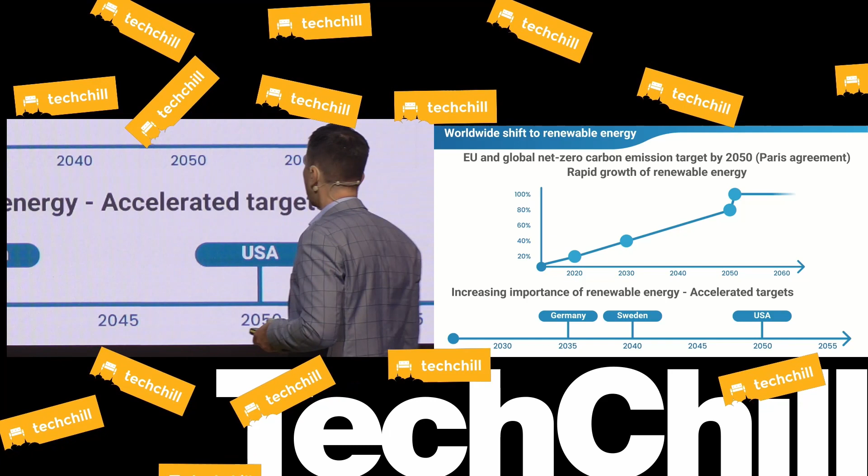So we investigated the wind industry. What we understood is to reach zero carbon emissions, the world needs to switch to renewables. There's an agreement, the Paris Agreement, where a lot of developed countries have signed that they are switching to renewables.

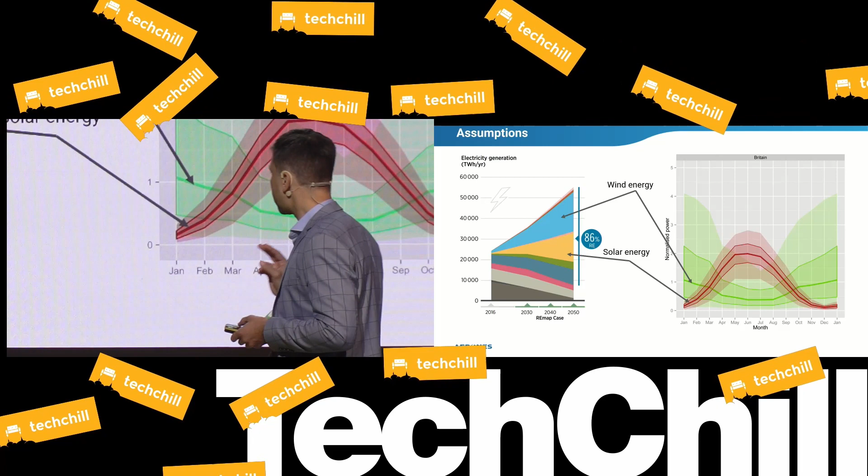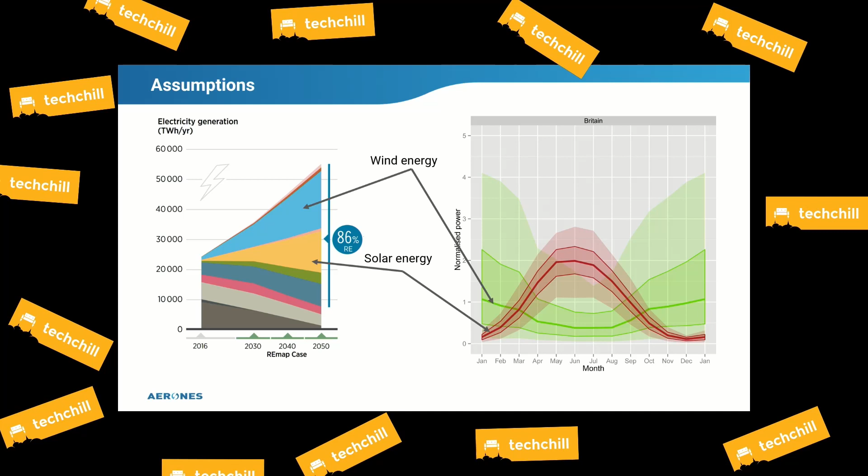We will drive a lot more electric cars, so energy consumption in the world will at least double in the next 30 years. The two biggest technologies to achieve more renewable energy are wind plus solar. Why plus? Because this is Britain - in January, February, March there's a lot of wind but practically no sun, also October, November, December. But when there's a lot more sun, there's a lot less wind. So they are complementary technologies, and wind will always be built together with solar to compensate each other.

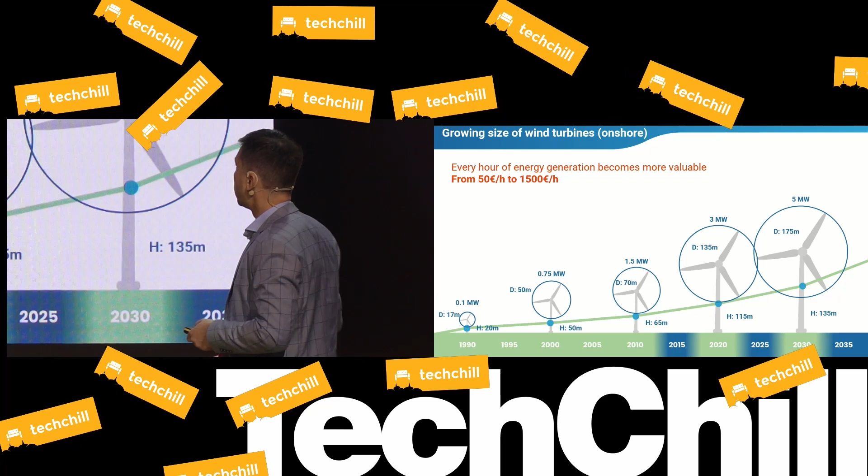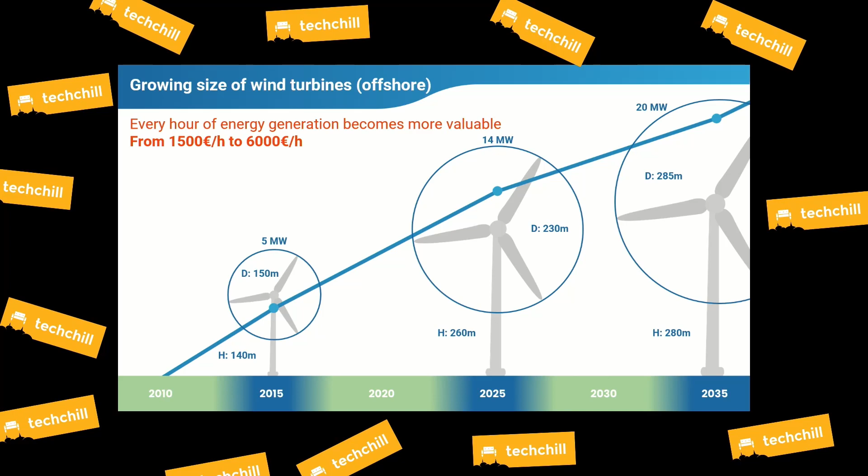Wind will grow approximately 10 times. Turbines will become bigger - every 10% increase in blade length gives 20% more efficiency. This is why they want turbines to become bigger and bigger. But the bigger the turbines, the more expensive the downtime due to maintenance, inspection, and repairs. The biggest turbines right now produce 1,500 euros per working hour, and future turbines will produce even more, up to 6,000 euros per hour. So the downtime costs more and more.

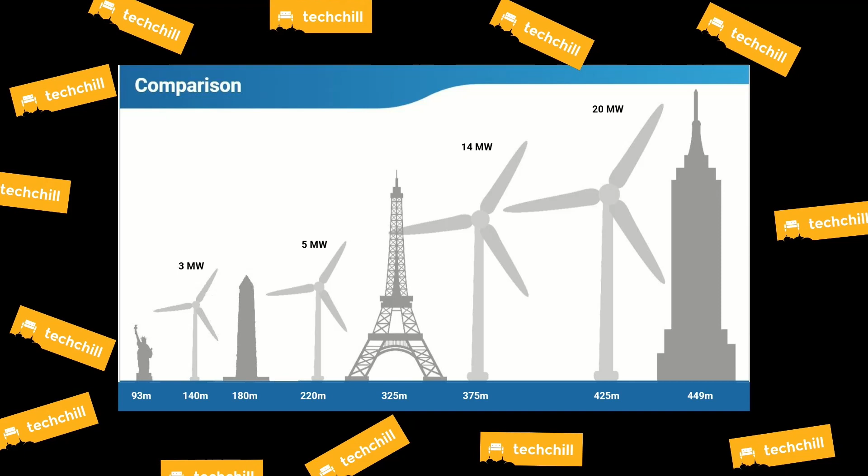You see the actual size of the turbines being built right now. But the bigger the turbines, the bigger the blades, the bigger the problems.

These high structures, wherever they are, lightning is damaging them a lot. One building receives one lightning strike in 5 years. Turbines are receiving hundreds of lightning strikes per year in some regions.

Bugs, dust, dirt, algae, resin on the leading edge of the blade reduce efficiency. When icing happens, turbines are stopped - they're producing nothing. Leading edge erosion occurs because turbines are spinning at 360 kilometers an hour, so whatever hits it hits hard. The water in the air actually works like sandpaper on the surface of the blade.

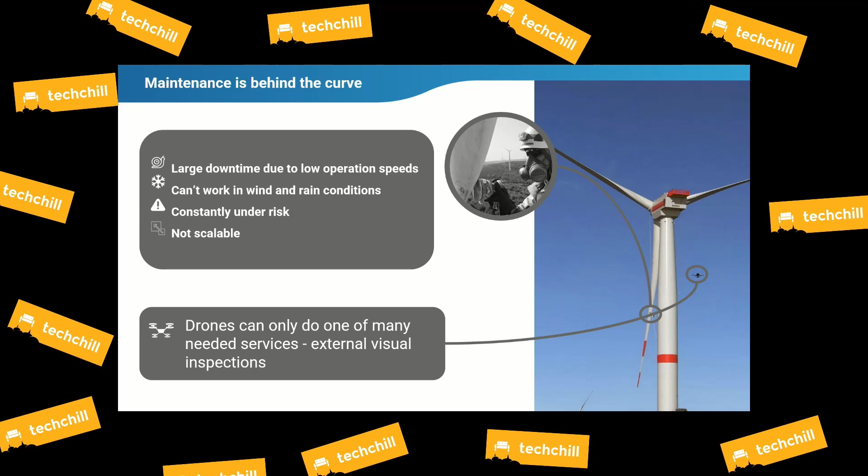They twist, they bend, they stretch, so they crack. There are a lot of oil leakages on the blade and turbines from the hydraulic systems, which need to be cleaned. Believe it or not, all of the maintenance and repairs on those huge structures are being done by people hanging on ropes, doing it by hand.

It's ridiculous. It was okay when the blades were 30 meters long and turbines were maybe 100 meters high. Now turbines are 400 meters high and blades are 120 meters - it's ridiculous. So some automation is inevitable, and here is Aerones coming to solve the problem.

In 2019, we started to trial these winch systems and robot. In 2020, we actually started doing the job on real turbines - working during the day, repairing the robot during the night, improving during the weekends. That was the path of how we were doing the job, and we succeeded. Customers started to believe that hey, it might work.

In 2021, we had 2 robots at the beginning of the year. We started to add more valuable services to customers, and customers started to believe and order more. We were becoming faster and faster by automating the robot and the processes and procedures in the field. Now we are scaling rapidly - starting from July, we have scaled a lot, and you will see that.

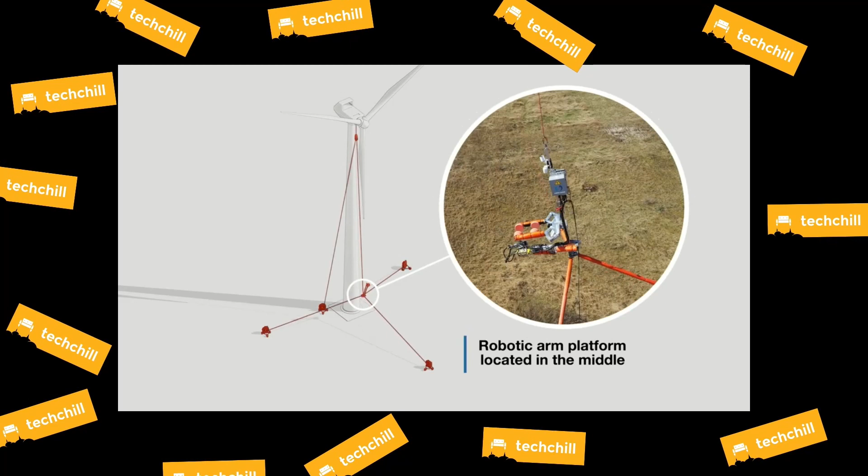So here's how our system actually works. We put 4 winches on the ground and a robotic arm platform in the middle. The first winch pulls the robot up and down, and the rest of the 3 winches adjust where the robot is in horizontal space. It's kind of like a 3D printer upside down. We can move at 4 meters per second speed.

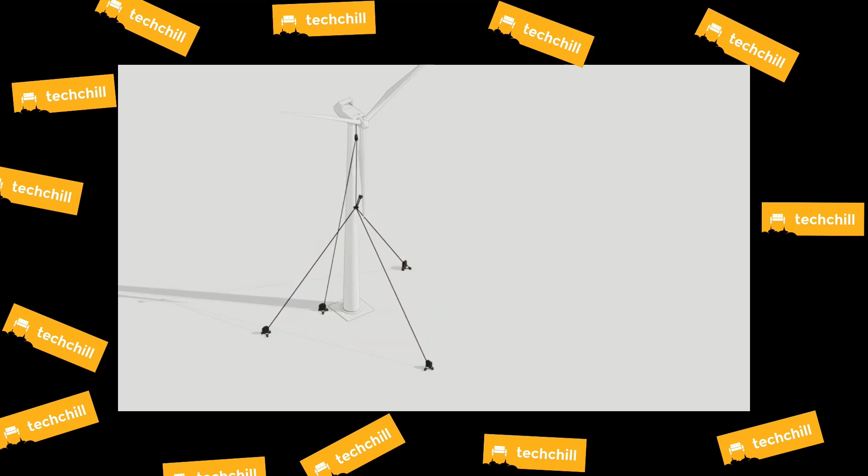Rope technicians, when they need to move from one point to another, like half a meter or a meter, it takes sometimes several minutes. We can move 4 meters per second. So we are not limited in our movements, we are not limited in our actions.

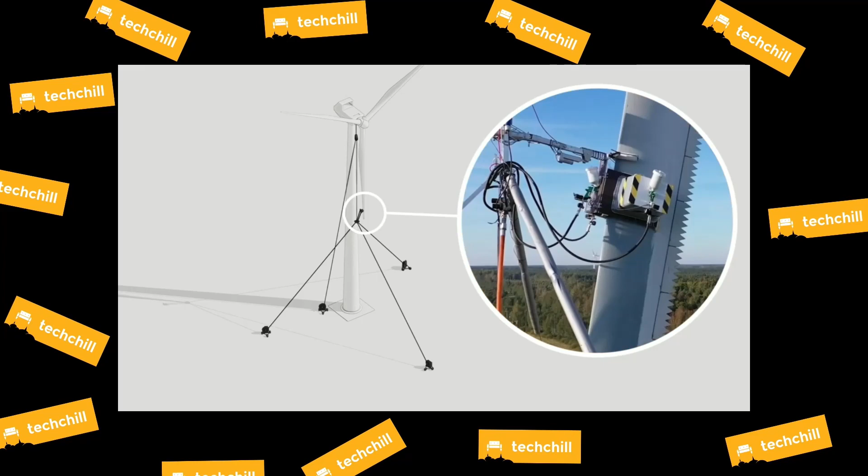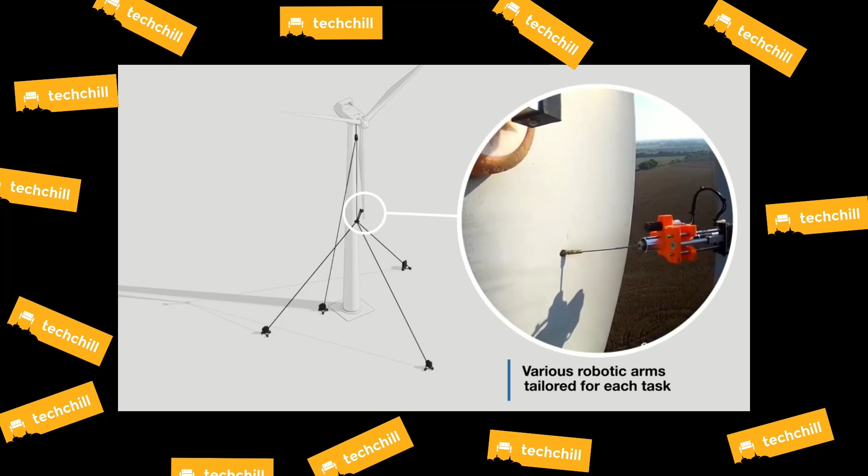In the middle, we change different kinds of arms to do different tasks: sanding, grinding, painting, cleaning, lightning protection system test, visual inspection, ultrasound, etc. So there are winches, there are robotic platforms, and here's the human. The human sits in a comfortable chair, controlling the robot remotely. The automation is now to the level that any guy who has played PlayStation learns to control this robot in 5 minutes, even less.

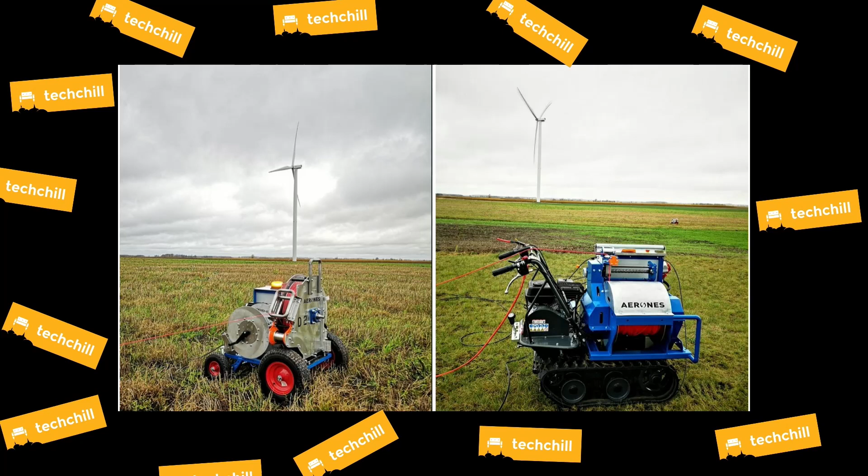The winches are simple to use, just put in one place, plug one connector, and it works. Currently, the guys are working in the field, one team with one robot, bringing, installing, and controlling in the same place. When Starlink is up and running, we will control the robots remotely. The teams will put one robot after another onto one turbine, then a second, then a third, and we from the office will control the robots.

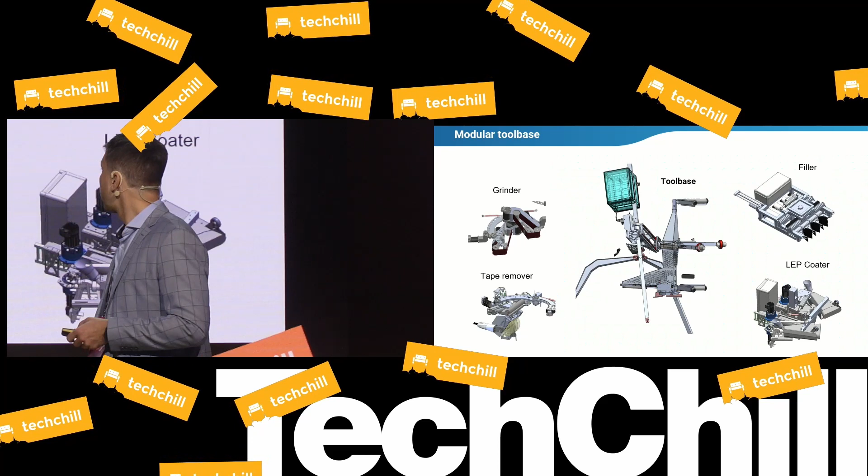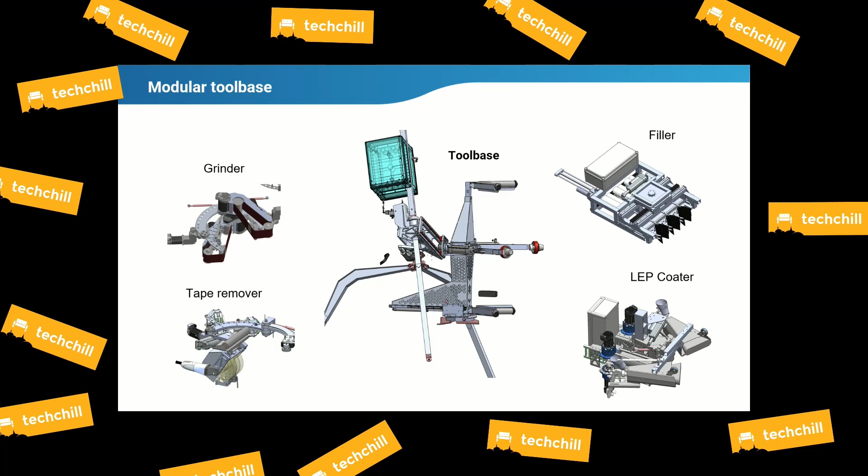Some of the things can be automated to the level that the robot is doing the job itself, about the tool base, yes. So the robotic system in the middle is a tool base with exchangeable arms which do different kinds of tasks: filler application, painting, tape removal, grinder, lightning protection system test, and etc.

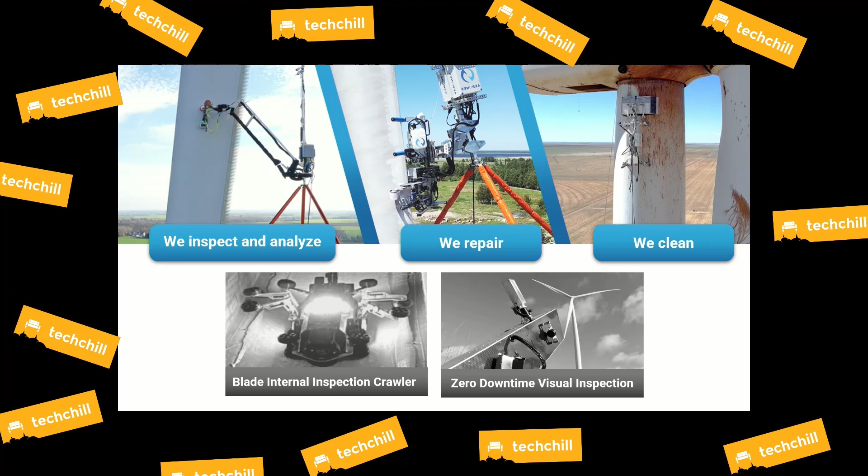So we have robots for inspections, robots for repair, robots for cleaning, and we built also, just to complete the bundle, one robot outside for visual inspection without stopping the turbine, and a lot smaller car, like a crawler, which we send inside of the blade to perform visual inspections from inside, like digital twins.

So this system is a lot safer. Nobody's dangling on the ropes anymore. On average, we do the job approximately 6 times faster. It's scalable. To train one rope technician takes months, several months. To train one guy to control this, a few days. Any guy who plays PlayStation, 2 minutes.

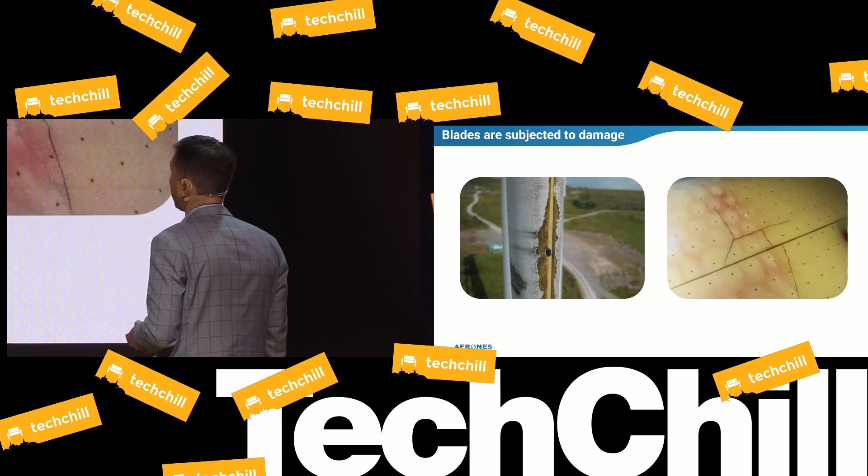Durability: we can work in a lot higher wind speeds. We are not risking life, so we basically don't have idle stay days in our projects, and it's more cost efficient. Blades are subject to damages. It needs to be repaired.

They are the highest structures wherever they are, so lightning strikes them a lot. We've tested more than 2,000 turbines right now. More than 20% of the turbines' lightning protection systems are not working properly, not protected against lightning. The highest expense for insurance claims is because of lightning.

Why isn't it being tested, why isn't it being repaired? Because it's too expensive. To test one turbine with humans takes more than a day.

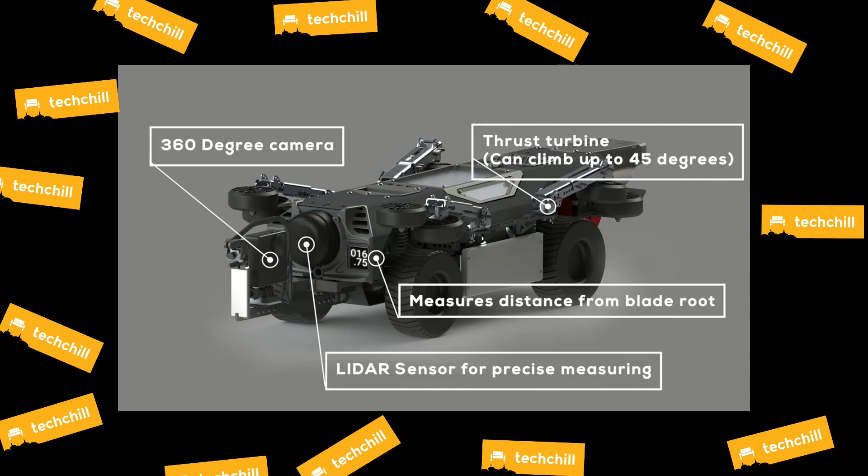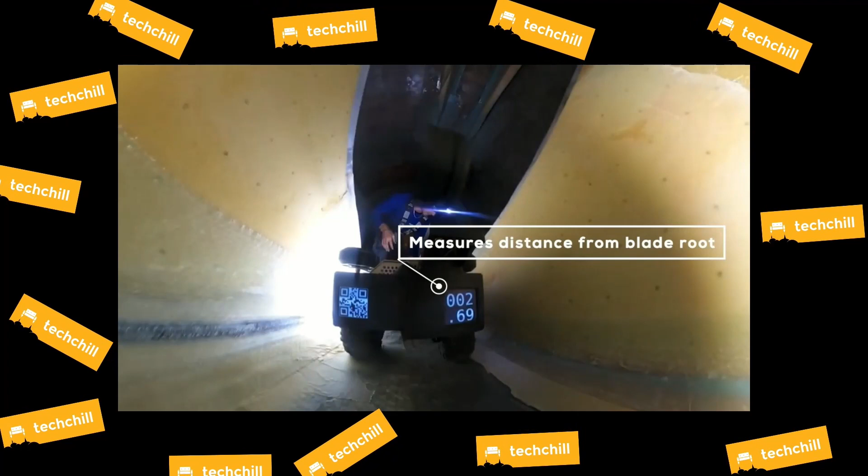Blade internal inspections: every crack, every blade that has fallen down because it snapped off, it's because a small crack became bigger and bigger until it snapped off. So we're searching for the cracks before they've grown. We want to track and find those cracks while they're small. A fast solution to do internal and visual inspection of the blades to find the smallest crack is very important.

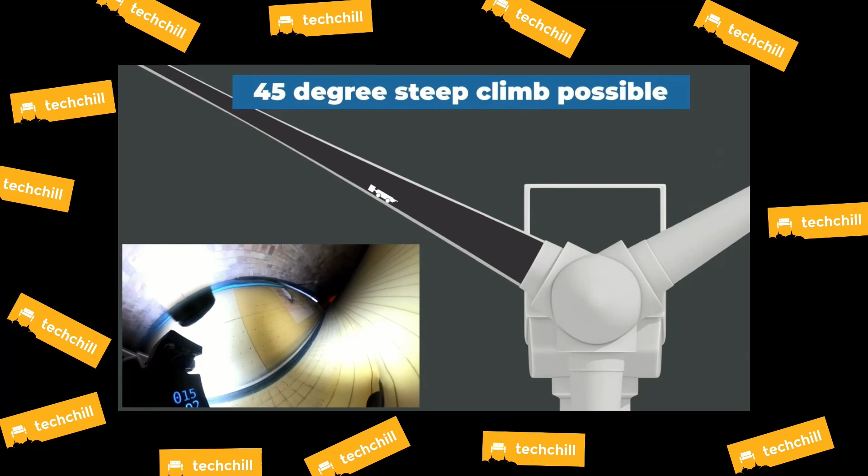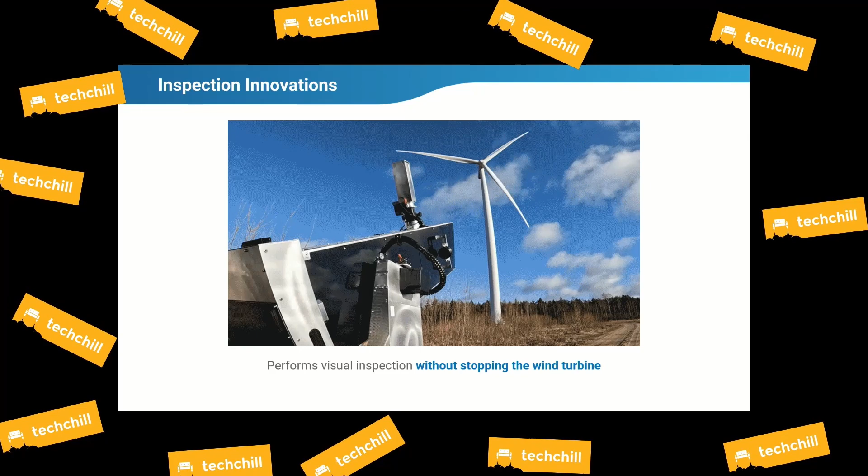For humans to perform internal inspection of the blade takes 1 day. For this robot, approximately 2 hours. For visual inspection, again, we don't even need to stop the turbine. We inspect all 3 blades without stopping the turbine, so zero downtime visual inspection.

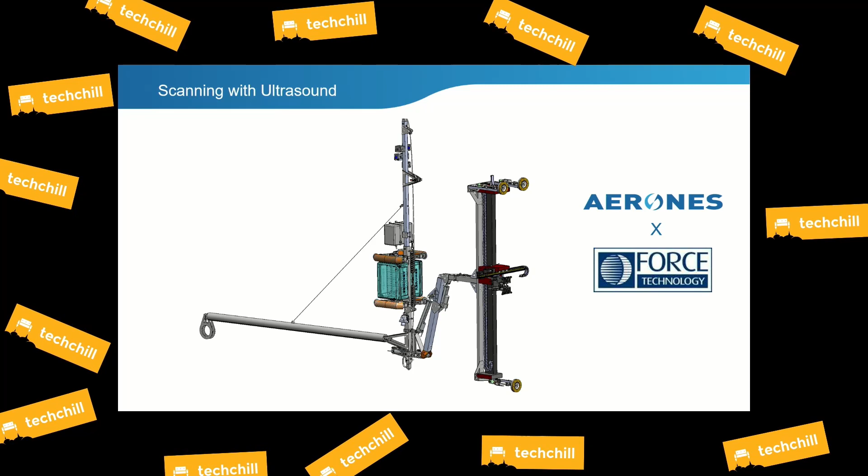And we are working now, with Force Technology, towards ultrasound inspection. Basically, ultrasound scans through the fibers of the blades. Every crack starts with an air bubble, a small bubble between the layers, so we want to find these cracks before they've actually become cracks.

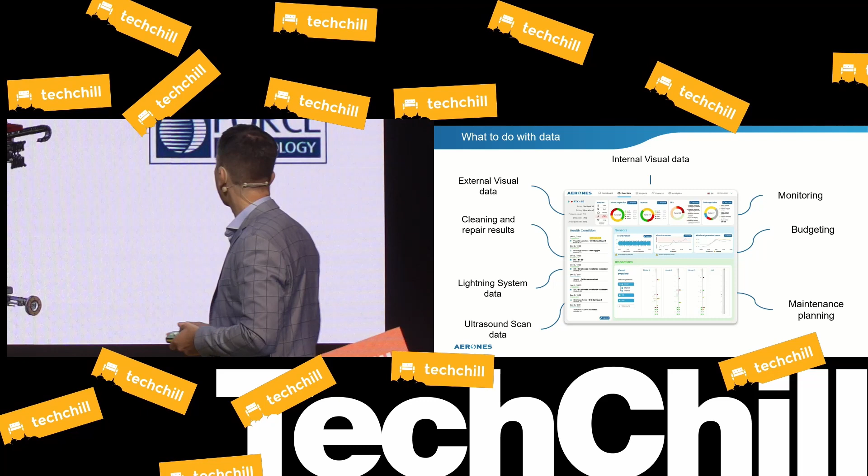We have a lot of data, so our robotic company is now switching towards also being a software company. We're building a huge platform. We have a lot more data than anyone else about the health condition of the blades of the turbines. We are building a platform where we analyze the data from our inspections, make suggestions about what should be done for every problem we find, and customers get the full budget of how to maintain and do the repairs, how much it costs, do the tenders, and task management for the technicians, etc.

And then we understood that, hey, we are doing a great job on inspections, but we are only bad news deliverers. So we want to solve some problems as well, right? So we started with maintenance.

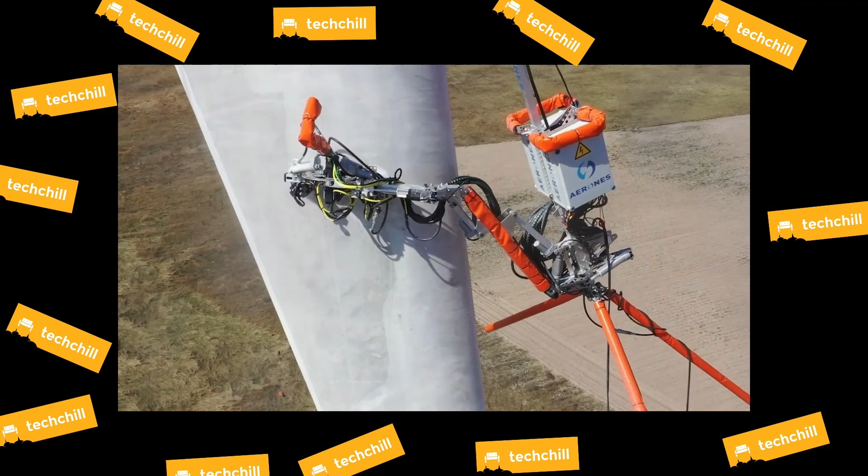We created robots to clean bugs, dust, dirt, and algae from the leading edge of the blades, which is reducing approximately 2% of the efficiency of the entire industry. We do the job approximately 6 to 9 times faster than humans.

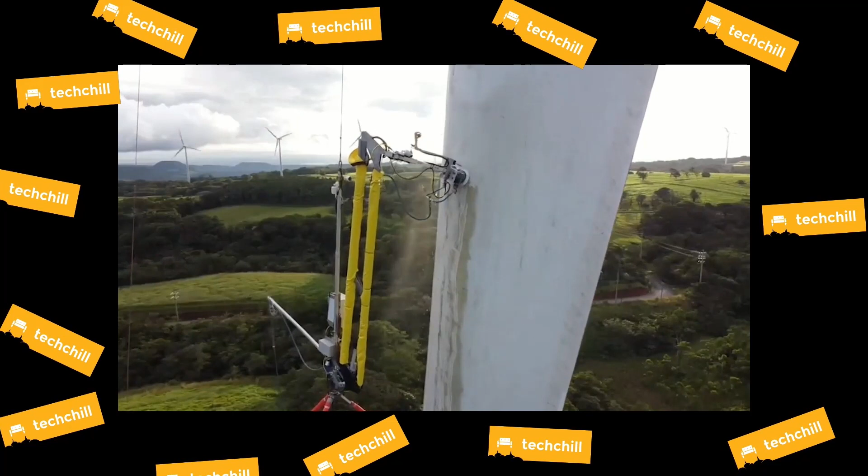Oil leakages which happen on the towers need to be cleaned off as well. Humans need approximately 3 to 6 days to stop the turbine to clean one tower. We need approximately 5 hours. So the downtime costs €1,500, in the future 6,000 euros. You can estimate that the expense of the downtime of the turbine is more expensive than the human labor on the turbines.

So we are changing that. We are reducing the downtime of the turbine during maintenance, and we are improving the efficiency. Leading edge erosion.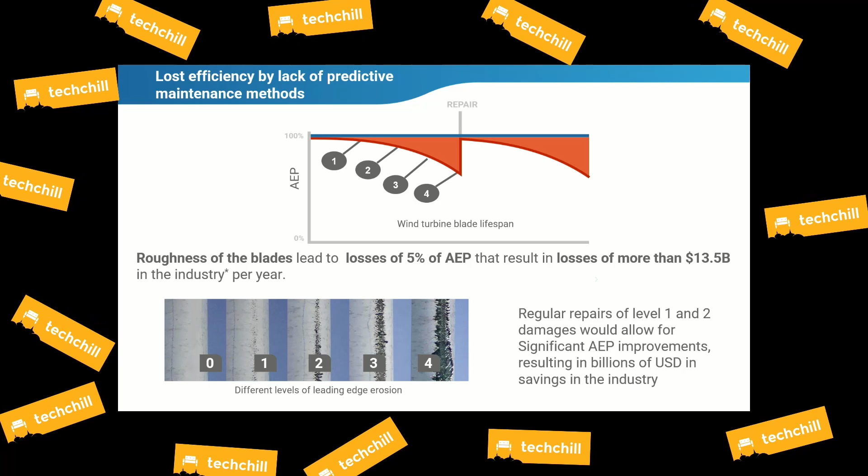Leading edge erosion happens to every single blade in the world. So it goes from this to this. Efficiency drops down — basically, a sharp knife versus a not sharp knife. When the efficiency drops down, they repair it, and the cycle continues.

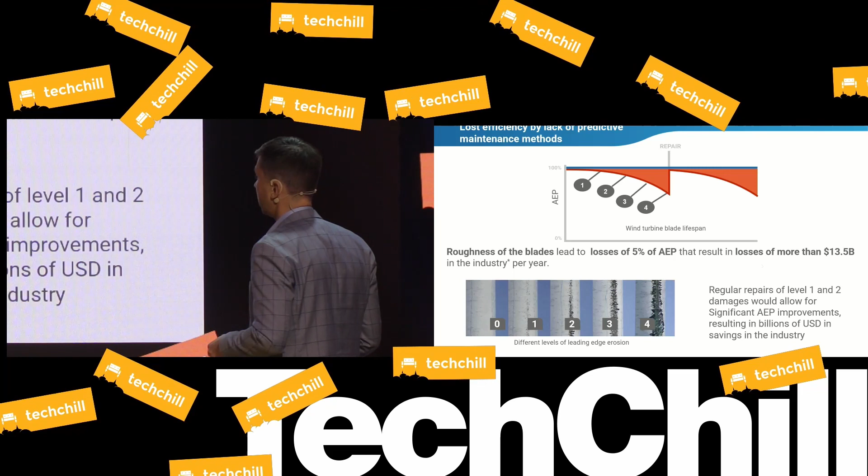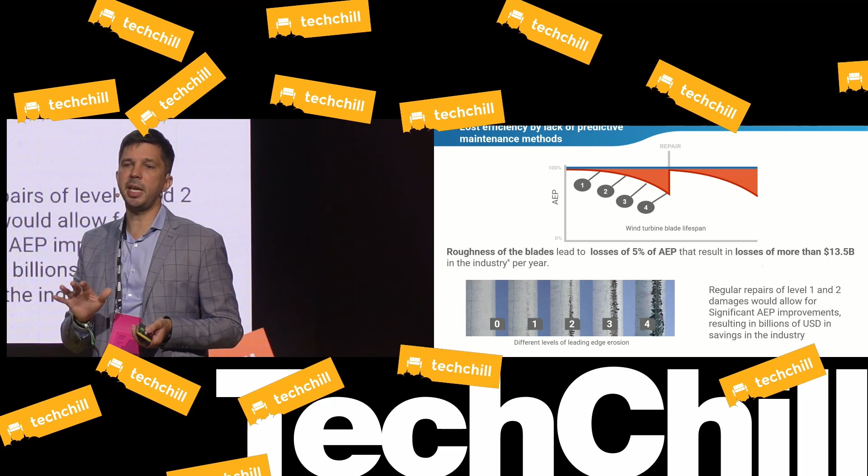The whole industry is losing approximately 6 to 12% due to these small teeth, which are basically cutting into the entire production. To repair this versus this for humans, on an area of about 25 meters on a 70-meter-long blade, it takes 6 to 12 days — it doesn't matter the level of erosion. So it's too expensive, and they don't do it.

Our robot can do the job in less than a day. Again, we are saving valuable downtime, and we are saving the efficiency of the entire industry by 6 to 12%.

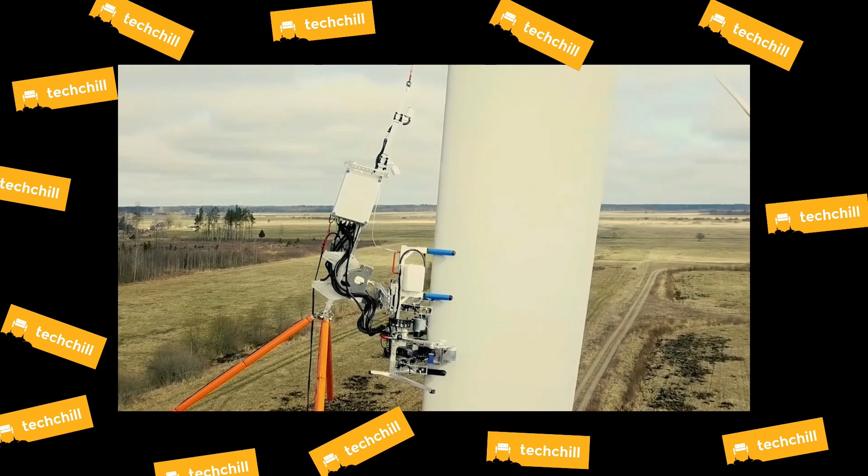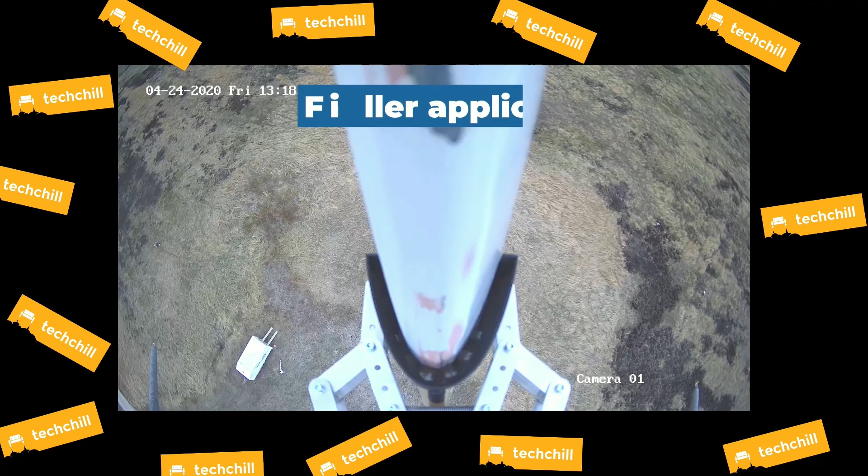It's very important, so we do the sanding and grinding. We apply the filler, and we do the painting of the blades 6 to 9 times faster than humans can do it.

Icing — when icing happens, the turbines need to be stopped. There's a treatment: you can apply ice-phobic coatings which prevent ice from forming. For humans to do that, it takes approximately 6 days per turbine. We can do it in 1 day.

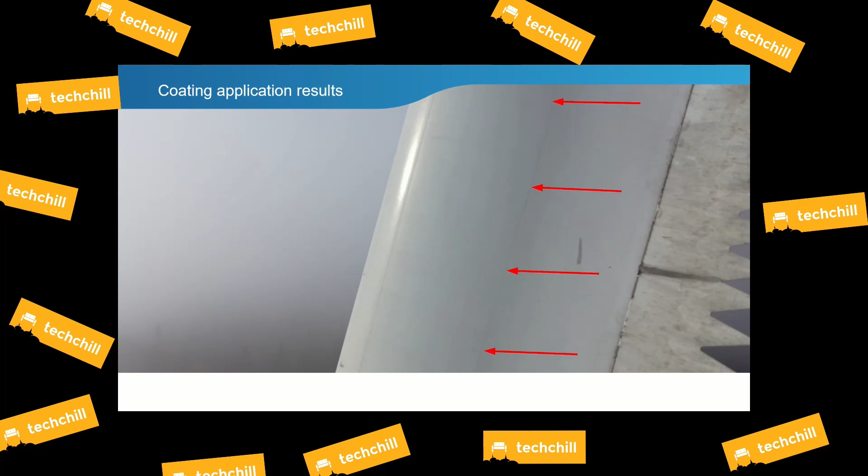It needs to be done every 2 or 3 years, so it's not being done by humans because it's too expensive and not efficient. We are bringing technology to do that a lot faster and in much better quality than humans can.

And the whole industry is moving towards offshore. We will see a lot of turbines being built offshore. So we actually got a European grant, and now we're building the offshore solution as well.

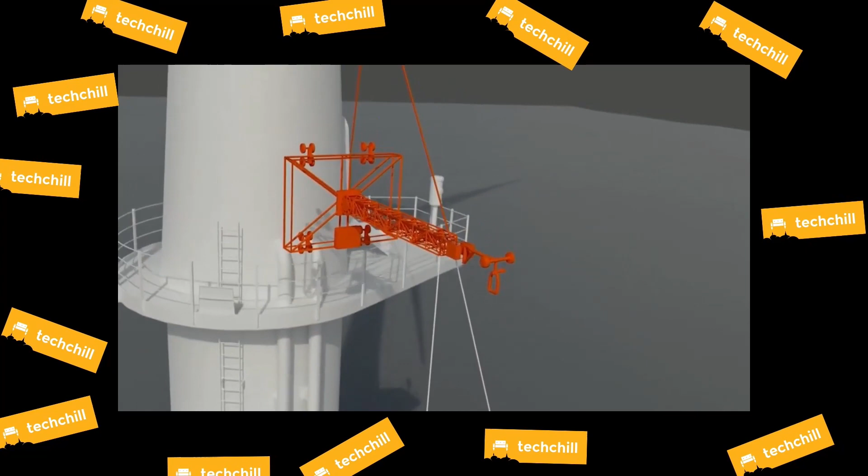It's another delivery system, not the winch system — it's a crawler with magnets that walks toward the tower and blade. At the tip of the system, we can put any single arm that we already use onshore, and we'll be able to use it offshore too.

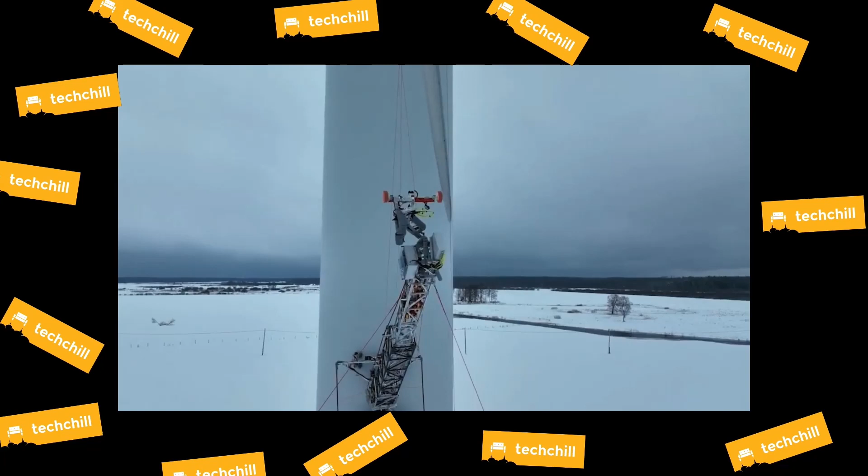So we will be operational offshore next year's summer — 2023, sorry. This is a robot we are already trialing onshore.

So yeah, we started as a small team. As I already said, the big turning point was in July 2021, when customers started to understand that it works, and now we're already 150 people. We've experienced huge growth in the last half year.

We have robots right now, shipping a new robot every week, if not 2 robots a week. We have robots in Latin America, South America, North America, and all over Europe. Our customer base is growing every week.

We are approved by the largest manufacturers of turbines — Vestas, GE, Siemens Gamesa — and we are a certified service provider for top 100 companies in the world. We are working with 70 of them.

We just raised $9 million to run faster. Our goal is to increase wind energy efficiency by 6 to 12%. It's actually doable — we're actually doing that. We will do that, and help the world become zero emission faster. Thank you.